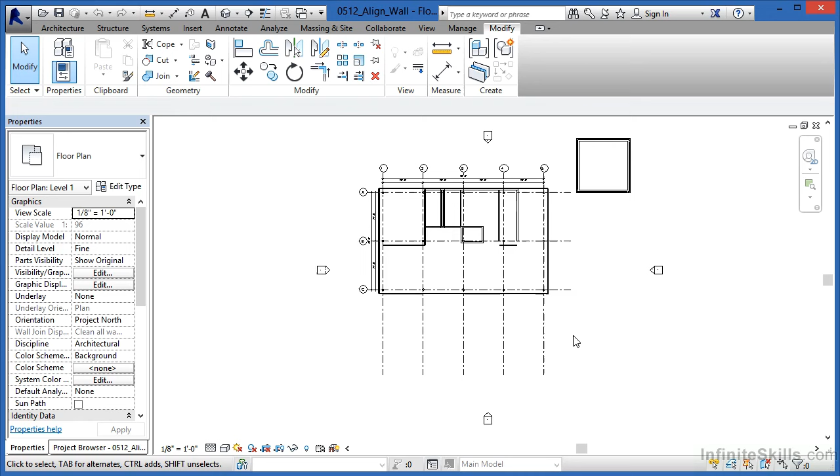When dealing with walls, the Align tool allows us to line up different walls with one another. To see this in action, let's zoom in over here to the left-hand side of our building, taking a look right about where column grid B is at. What I'd like to do is extend this particular wall over and align it with this wall.

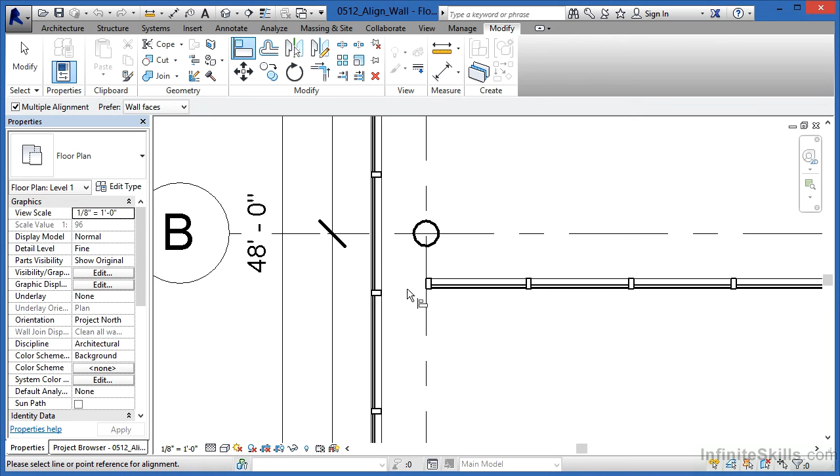To do that, we need to start off by selecting this particular curtain wall. Now select the Align tool. After picking Align, pick the face of this mullion and then the endpoint of this curtain wall. And we can see they're now lined up with one another.

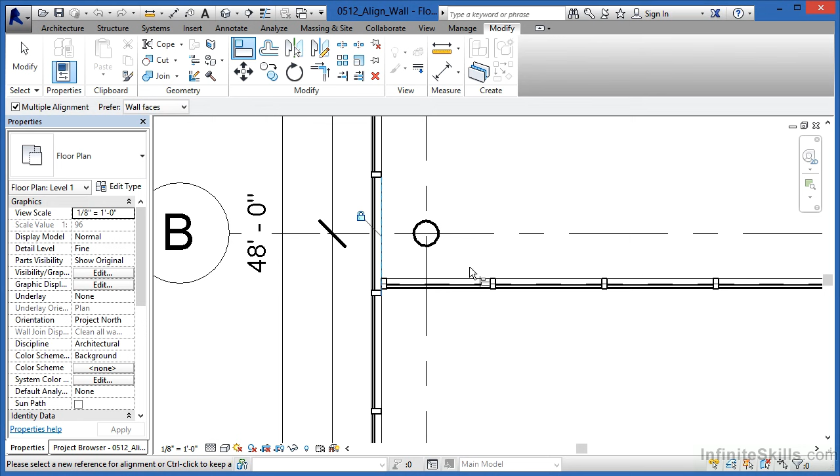If we click the little padlock, they'll stay lined up with one another even if the floor plate should change a little bit, so that maybe this curtain wall would expand out to be a foot further out or a foot further in. This wall would also get a little bit longer or a little bit shorter as required.

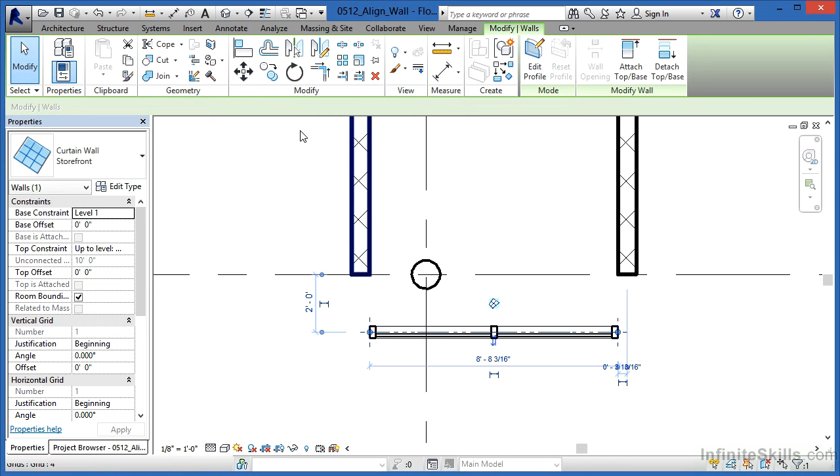Also, if we zoom back out again, come over to this side of the model, let's go through the same process. Except in this case, I want to bring these walls down to line up with the face of the mullion. Hit escape a couple times to get out of the command, select on the curtain wall, and then choose Align.

Make sure that you have a check mark in multiple alignment. If you do, it means that we can pick this wall and have them both come down. So highlight on the face of this mullion right here, pick the face of this, and it's going to drop this down so it's in alignment where this blue dashed line is at.

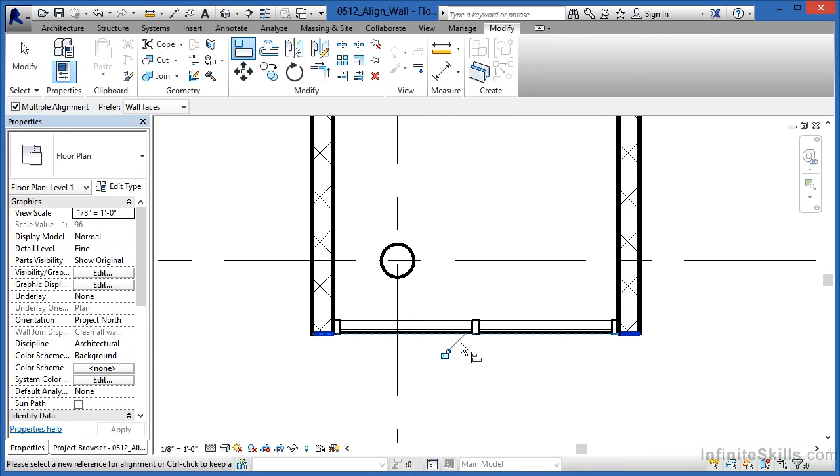Do the same thing over here, and we can see they're now both aligned flush with this wall here. Now, if we hit escape a couple of times, it may look like they're not quite perfectly aligned, but the only reason is that the lines have different thicknesses associated with them.

If we want to see this without the line thicknesses getting involved, move up here to the View tab and pick on Thin Lines. And we can see that, in fact, these lines do line up.

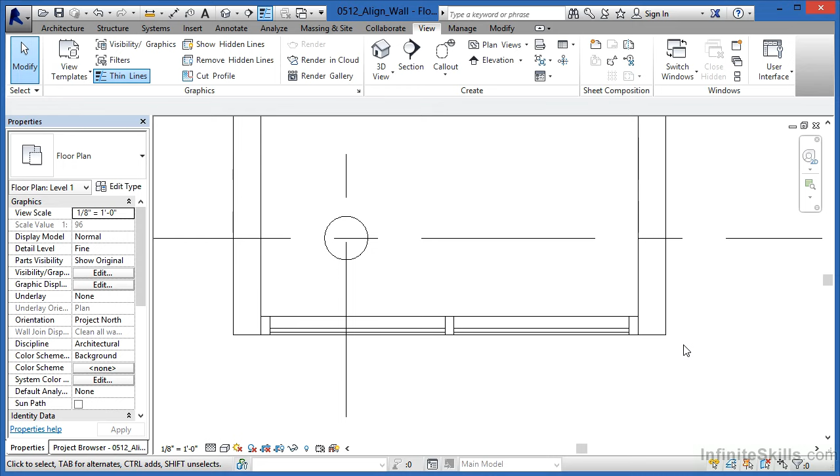Now let's do the same thing over here. What we'd like to do is have the face of this wall line up with the endpoint of this wall right here. So let's go through the same process.

Select on one of the walls, come up to Align, pick the face you want to align to, and then pick the face that you want to have aligned to that blue dashed line down there below. And we can see it's now moved it off, and it's now lined up this wall with the endpoint of this wall right here. So the Align tool's job is to line up the face of one object to the face of another object.